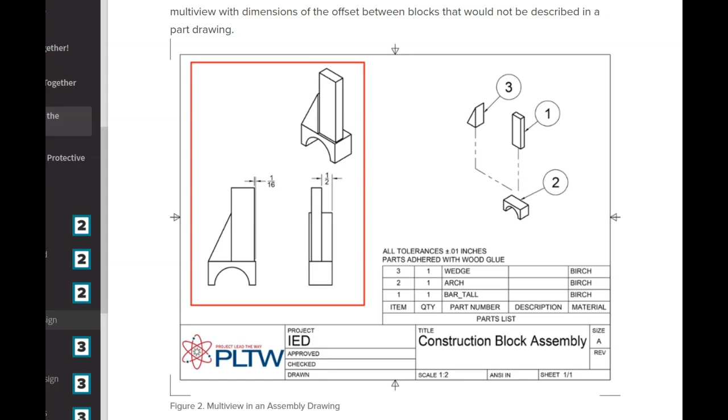Let me pull up Fusion. For the first part, I created a folder called A2.1.4 and saved this file as construction block assembly. Fusion 360 really likes you to have the file saved prior to importing or inserting other components.

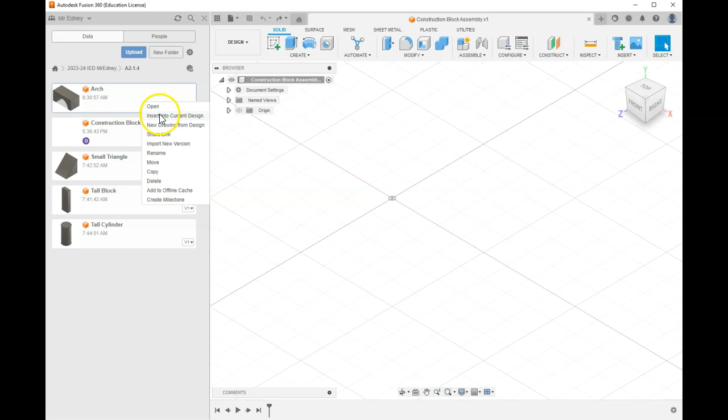So we have that done, and I'm going to build something similar to what's in the assembly drawing. I'm going to insert the arch first, into the current design, and it inserts it at the origin. I'll hit OK. The first thing I want to do is ground this particular part, so it won't move. In the same way we saw in the video where they grounded a part so it wouldn't move, we're doing the same thing here. Now this thing won't move around on us.

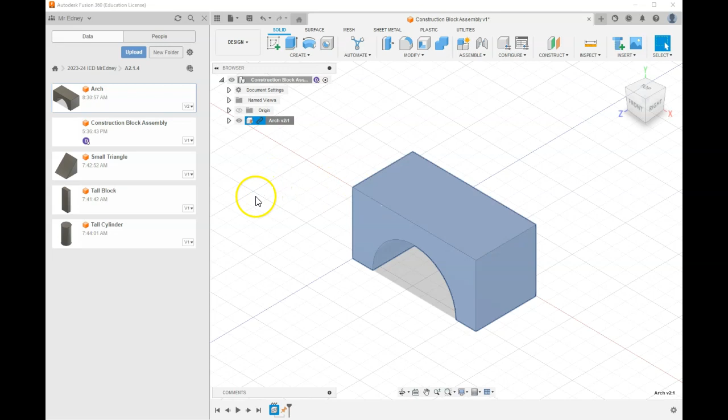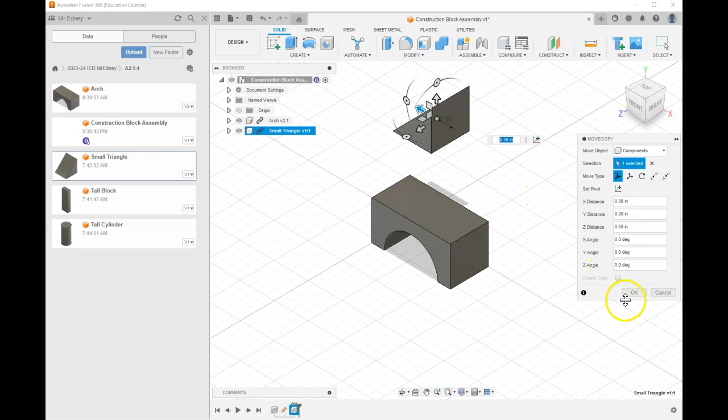The second thing I want to add in is the small triangle. I'm going to insert that into the current drawing. When we bring it in, it gives us this auto move, and what I like to do is get it set up in the orientation I want to assemble it. So I'll set it up in that orientation, then move it over a little bit. That's pretty close, so we'll hit OK.

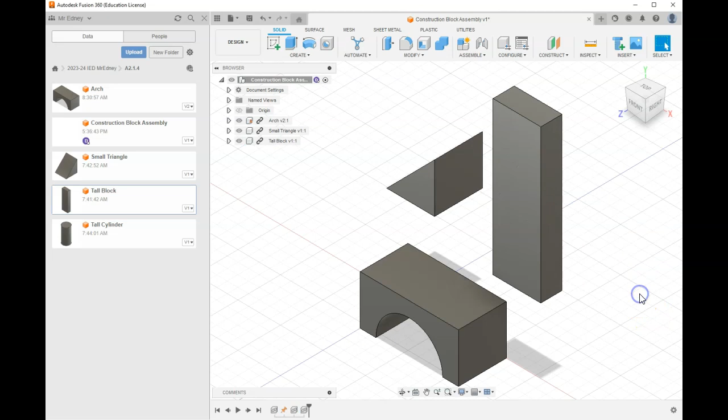Next, I want to insert the tall block. I'm going to insert that into the current drawing. That's actually the orientation I want it in, and I'm going to park it just to the right there. This gets us to the point where all three of my blocks are in place and I'm good to go.

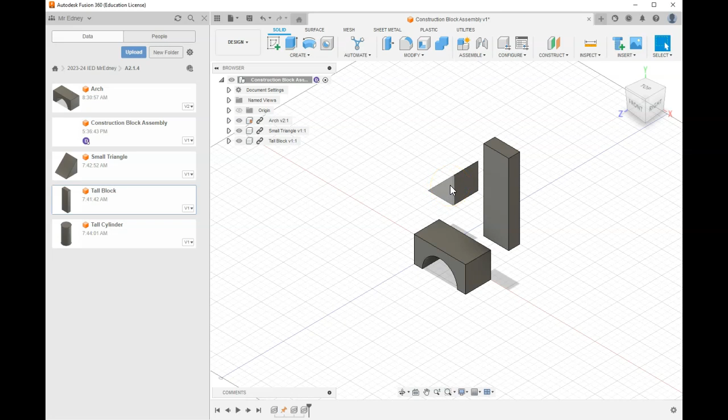So we'll start assembling this. Now, of the assembly techniques and joints we've talked about, one is rigid, and that's what we want to do here - basically put this thing together. I'm going to get into the orientation I want, which is right here, and I want to move this block to basically that corner.

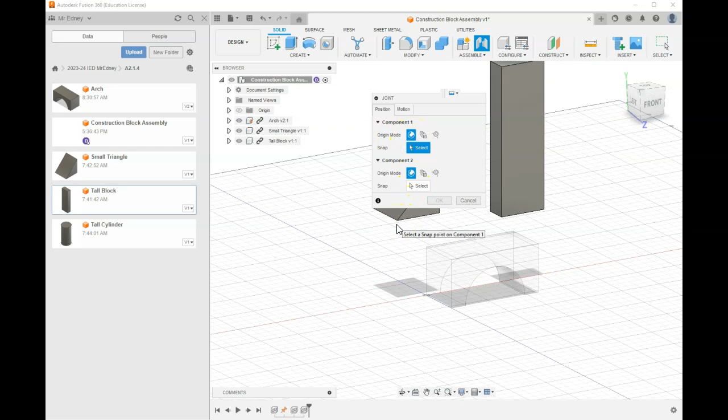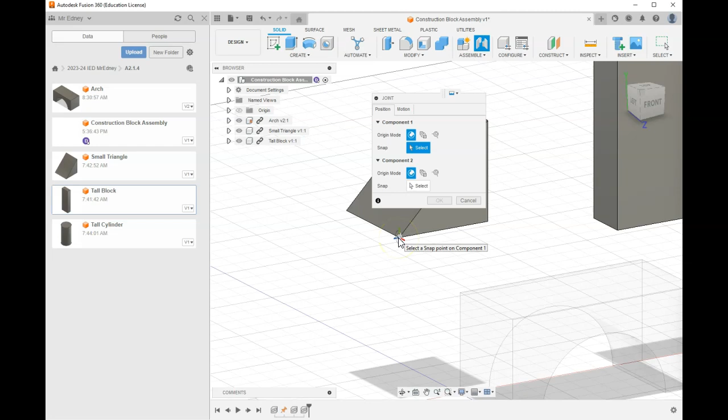I'm going to go into my assembly bar. Motion is rigid, position is simple. I'm going to select, and come into this little guy here, and I want to be fairly careful. One of the additions that wasn't in prior animations is when I select this orientation, it's saying I want blue out away from it and then red to the right. So that's important - I've selected that guy. Remember, blue to the left, red to the right, and green up.

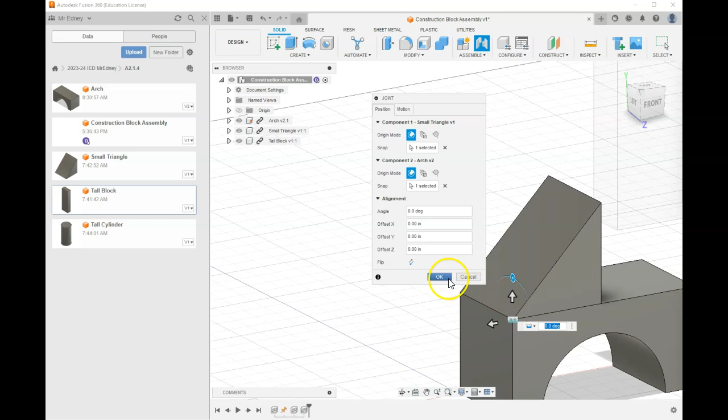Now I'm going to select the second part, and that's where I'll go to here. That looks like the same orientation, so I'll click there. Then it's going to move it and snap it right into place. Okay, so that's part one.

Part two is this guy. So we'll leave a pause in here. Okay, wow, all right, so you can notice I've zoomed out here.

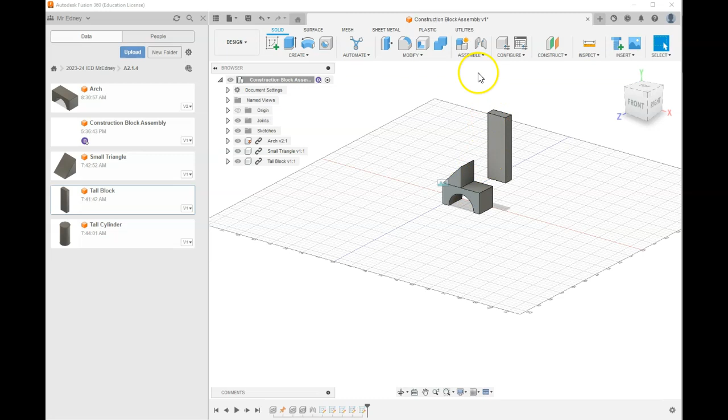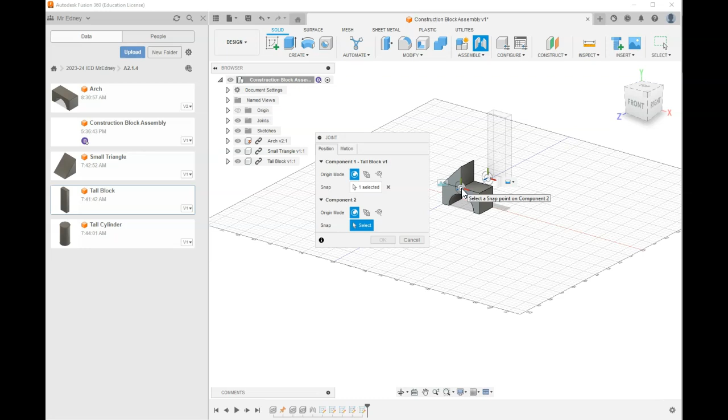So I tried a couple things. I tried to create a sketch and create a point - it didn't like that. So if I'm this far out and hit joint, same thing - I'm going to select here, and you can see blue is coming to the left, red is to the right, maybe hard to see, green is up. Then I'll select another point, and blue is coming out, red is to the right, and green is up. If I click that, it goes right in where I want it to go, and I'm just going to take that for a win.

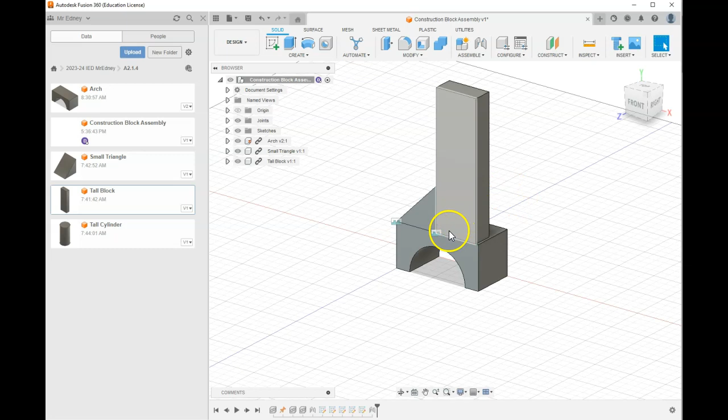So at this point, I have everything assembled and created. We created the drawing, saved as a copy, imported in the three objects, and then created these rigid assemblies. That's going to be enough for video 1, and then we will take off into video 2.